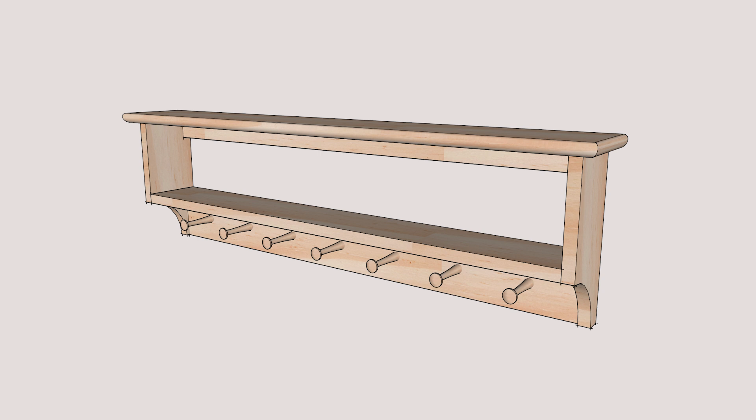I thought it would be nice to come up with a simple project that the carpenters could build during the class so that they could learn how to use power tools and important design characteristics in woodworking. So I thought I'd show you how I designed this rack in SketchUp and how I took that information then to the shop to build it.

I want to step through the design process and my thoughts on this coat rack. I wanted to make it simple to build, so I started with simple shapes.

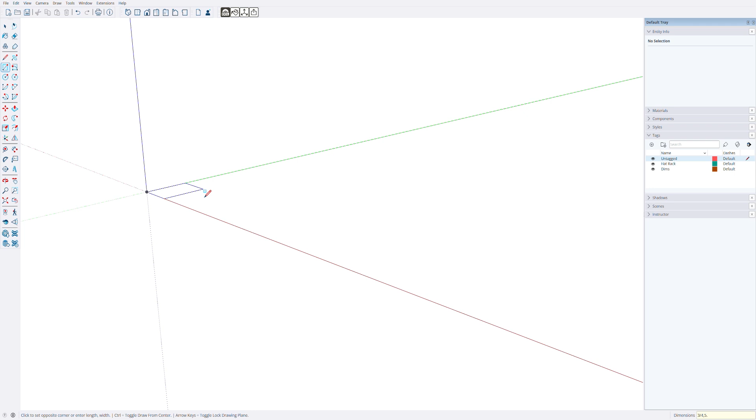Here I'm going to start with the ends. They're going to be 3/4 inch thick by 5.5 inches wide. And for length, let's just go for 10 inches.

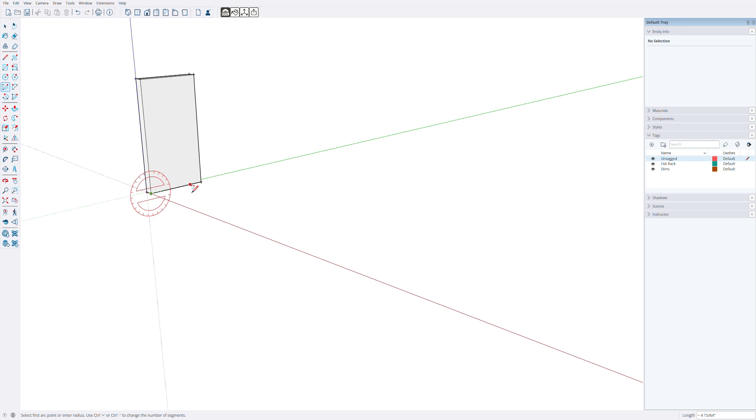I thought, well, let's put a little visual interest on this. So I thought maybe I would put a cutout here, an arc cutout, like so. I'll push pull that. I'm using the professional version of SketchUp.

Your mileage may vary. It may look a little different on the free version, but you should be able to accomplish the same thing on your version.

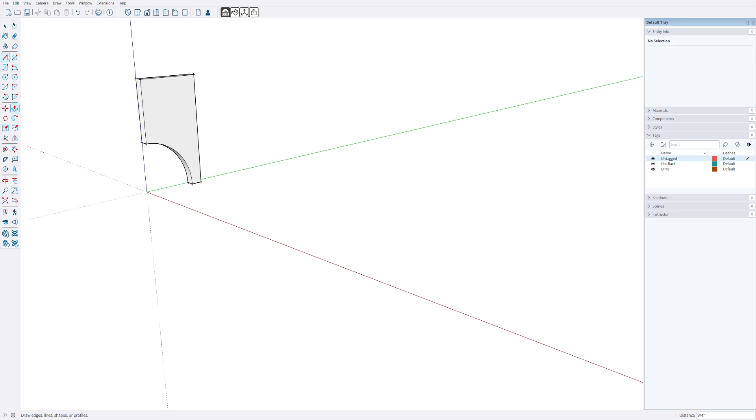So here's what I thought would look good for the end of the shelves. I'm going to go ahead and triple click on that and make that into a component and call it end.

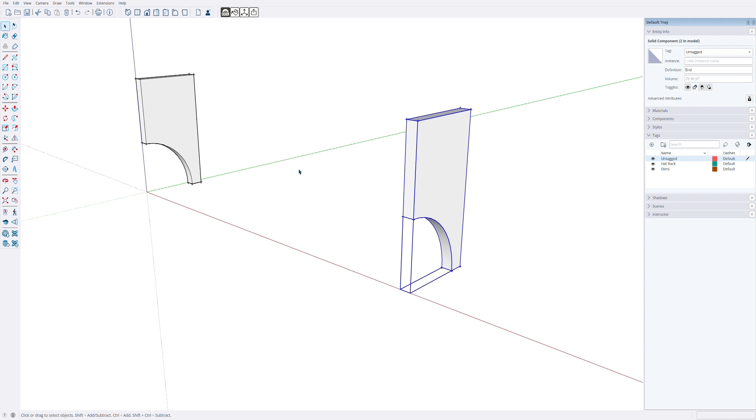So I need to copy that to the other side. Now the question is, how long should I make this? And that is entirely up to you. For me, the one I'm making has to fit a particular space in my home. The space in my home will accommodate about a 38-inch long shelf or wide shelf.

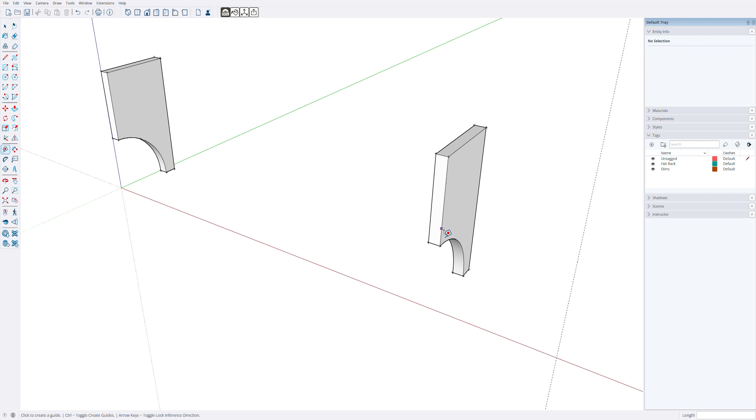So I'm going to put a construction line in here and go along the red axis 38 inches. And now I can move this guy to that line, and I have 38 inches between them, or 38 inches end to end.

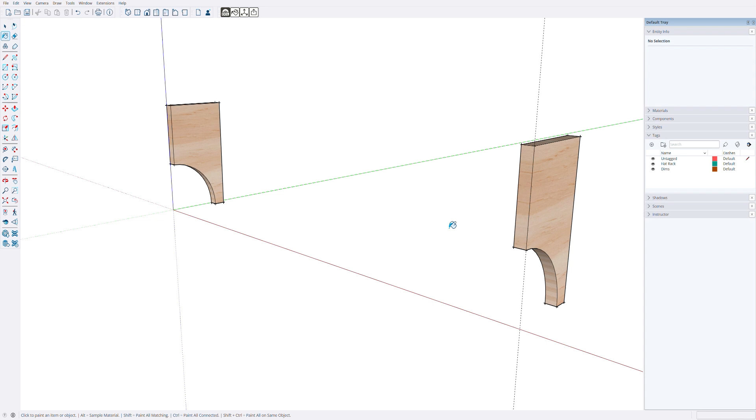Okay, so those are the ends. Let me go ahead and put a color on these just to make them easier to see. I've actually got a material that I've used that I developed just by taking a photograph and making a new material. That's something you may or may not be able to do in the free version. And I realize the grain direction here is wrong, but we'll address that at some point in the future.

All right, so I've got the front of my shelf, or the ends of my shelf done. I need to figure out the structure of it.

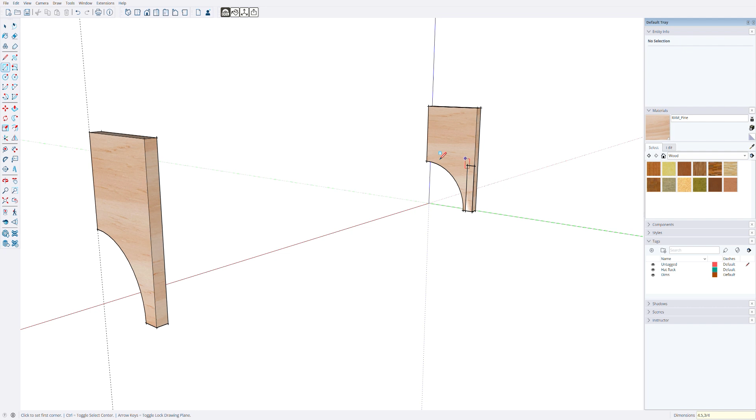So I thought for the back, I would use a 1x5 here. And I'm going to use the push-pull function to drag that across to here. I'm going to make that a component and call it the peg rack, because this board is where the pegs will actually be mounted to hold the coats or hats or whatever it is you have.

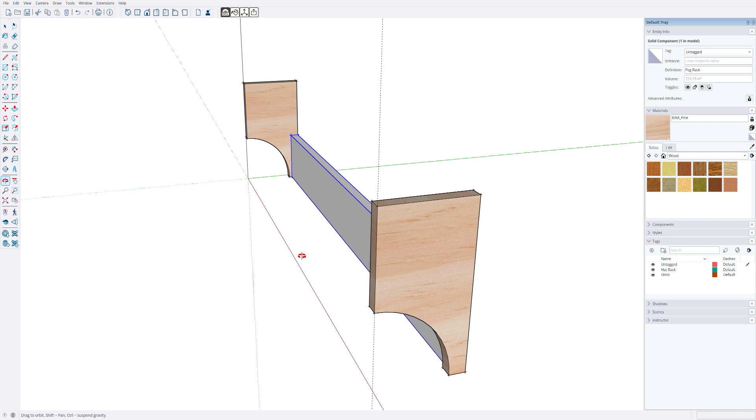So I'm going to put a shelf in here. I'm going to make it the same width as the ends, which is 5.5. So it'll be 3/4 inches thick by 5.5.

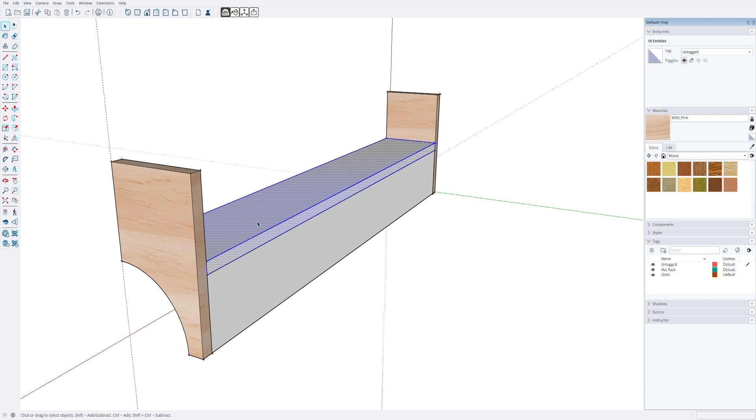And just like I did for the back, I'm going to use the push-pull command and drag that over to this edge of the end. I'm going to triple click on that and make that a component. I'll just call that the shelf. Go ahead and add some material.

So that's starting to take shape now. I'm going to go ahead and get rid of the axes just to make things a little clearer, and I'm going to delete the guides for right now.

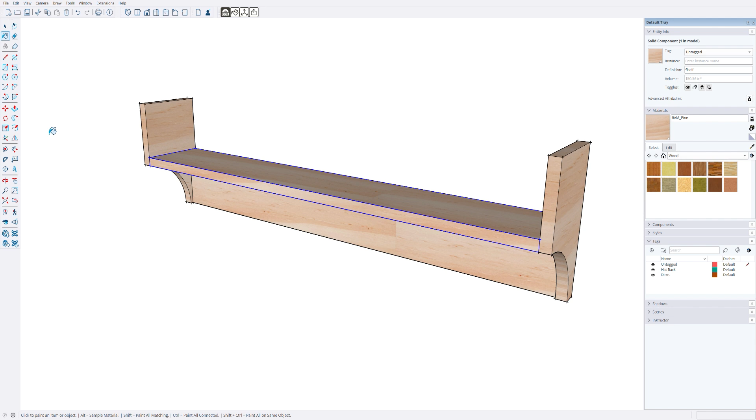Don't need those. Now for the top, I think I want a 1-inch overhang on the ends and the front. And the way I do that is I come in here and I'll just go ahead and draw a rectangle from corner to corner, use the push-pull command, and we're going to make a top that's 3/4 of an inch thick.

And then I'll come down to the end and extend that 1 inch, come down to the front, extend that 1 inch, and come down here and extend that 1 inch. So that's what the top looks like, but it's kind of boring that way.

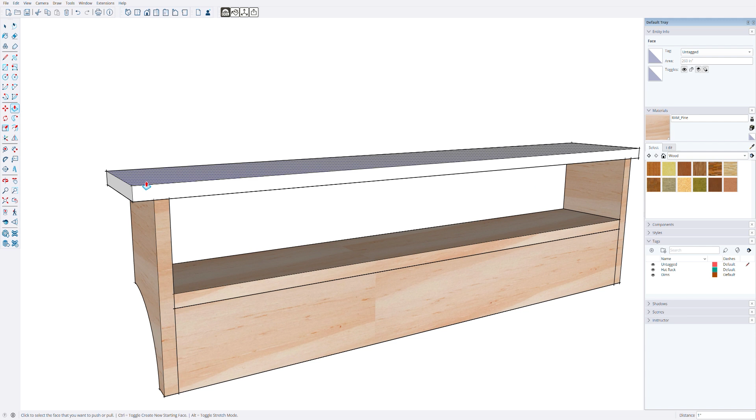So I thought maybe I would put a profile on here. And to do that, I'm going to use the follow me command. So I got to draw some guidelines in here. I want the top edge to be a 1/4 inch radius and the bottom edge to be a 1/2 inch radius. I'll draw some guides in here.

There's my 1/4 inch, my 1/2 inch radius, come up from the bottom edge, 1/2 inch radius, and this should be a 1/4 inch. So I'll go in here and draw some arcs. And I'll draw the 1/2 inch arc. And we end up with something that looks like this.

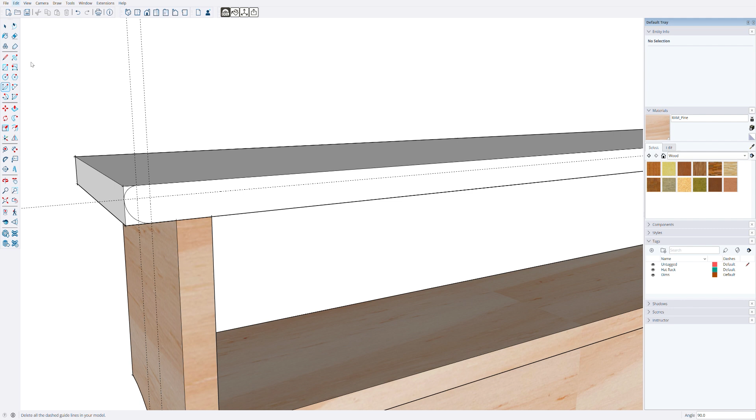I should be able to use the push-pull command, or I'm sorry, the follow me command, to extrude that all the way around the 3 edges. Let's see if I can do the same with the 1/2 inch.

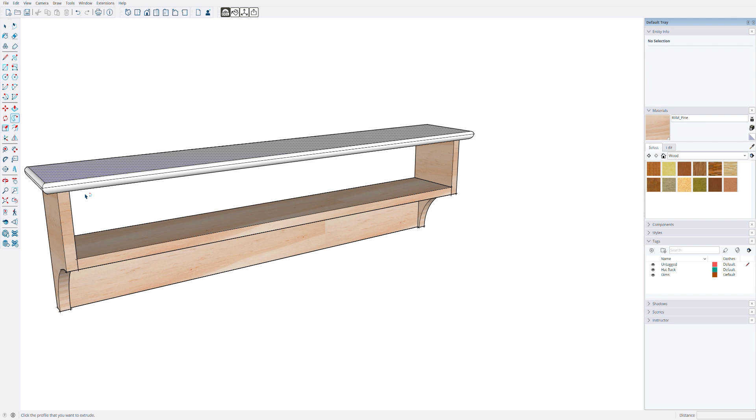There we go. Now I've got this ugly line on the front, so I can just go into my erase command, hold the shift key down, and it'll get rid of that line without erasing anything else. It's a handy little trick to clean up your drawing.

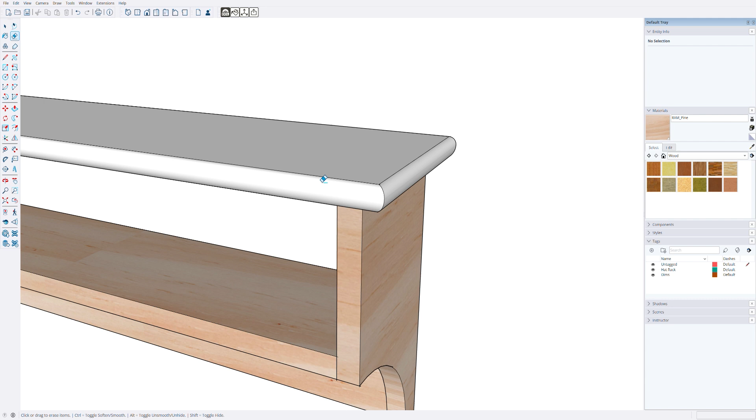So I'll put a material on that. Let's go ahead and make that a component, so I'll call that the top. And put a material on it.

And that pretty much completes the structure, except anything I hang on the wall, I like to include a hanging rail. Now obviously we can fasten this to the wall through this piece here on the bottom, but I'd feel better if I included a hanging rail at the top.

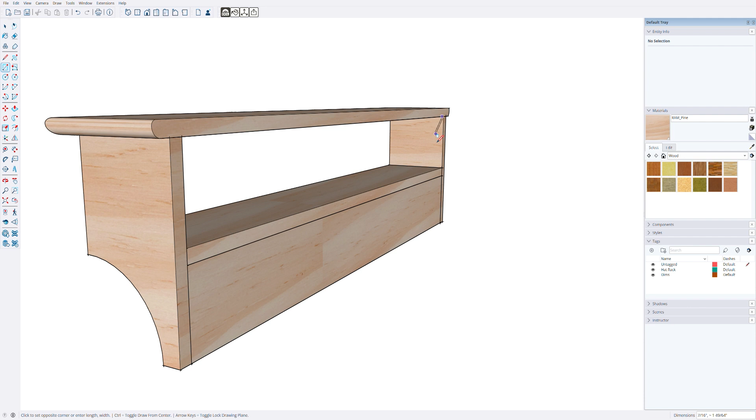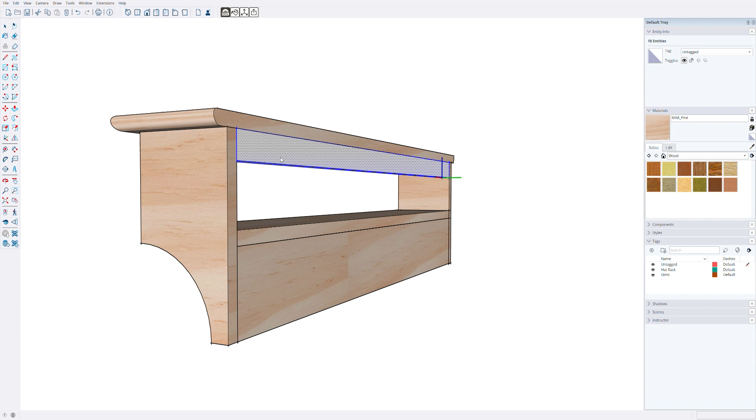It's just going to be about 1.5 inches or so in length, like so. And I'll use the push-pull command to drag that over to this edge. Make that a component and call that the hang rail, and apply a material to that.

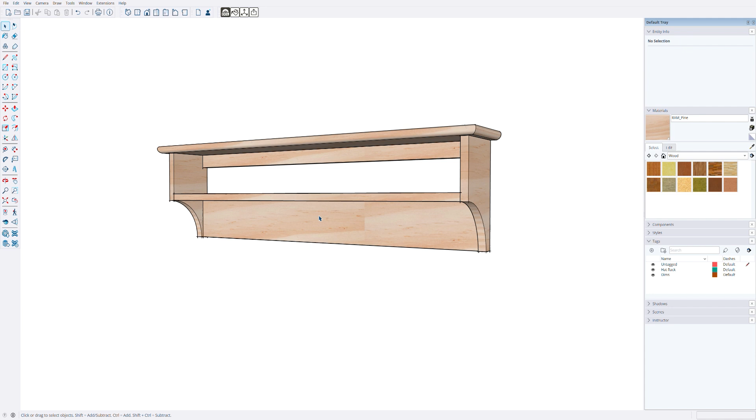So now I've got a place to anchor this to the wall through both the top, and if I feel like it's necessary, I can do it at the bottom also. Winter coats, if you're in a cold climate, can get rather heavy, so make sure you secure this to the wall in such a way that those aren't going to pull the shelf off.

All right, so the only thing I've got left to do now is add the pegs to this rail at the bottom. To do that, I used the 3D Warehouse, which is available with your SketchUp account, and I just did a search for shaker peg.

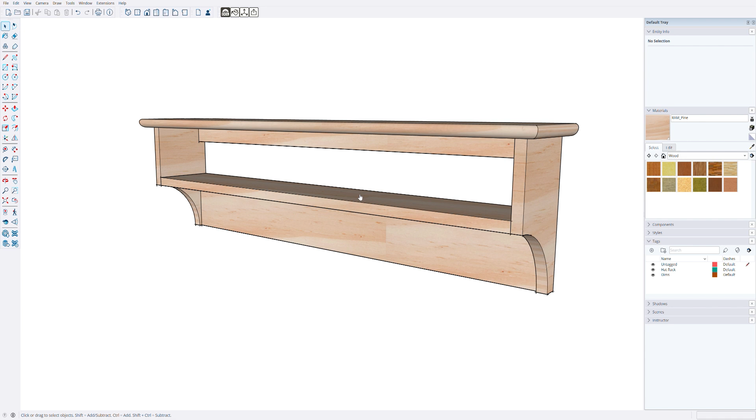You'll find a variety of them. You can click on it and download it to your model, and then just place it. Now the origin point that they include is sometimes random, so you just have to place it and then you can fine-tune that later.

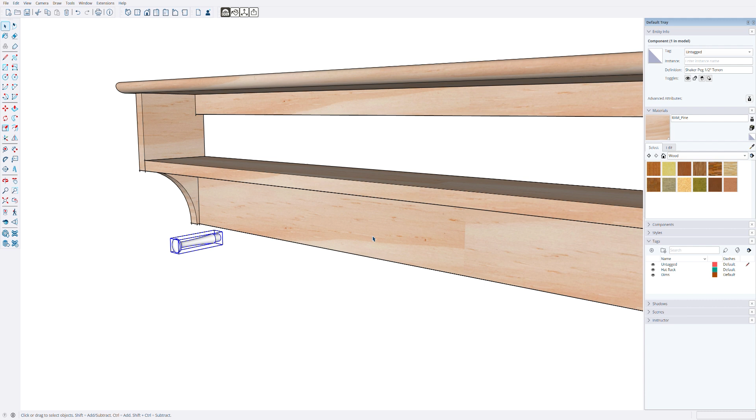Alright, so I know that this shaker peg has a 1/2-inch tenon on the end, so I need to put 1/2-inch holes in this rail to accommodate the peg. So I'm going to draw a guideline here that's at the midpoint of that rail.

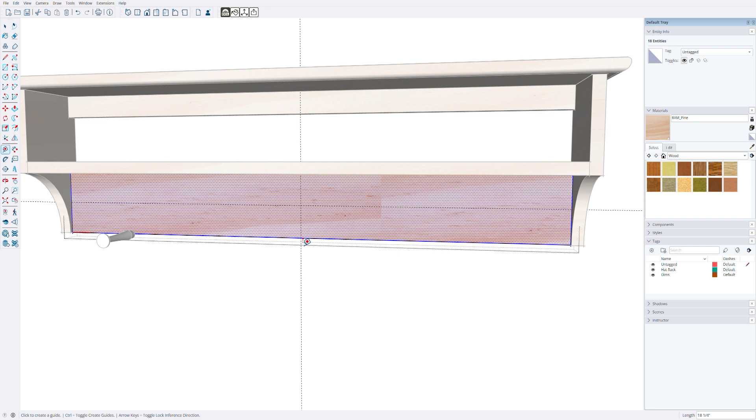And I'll come in, I'm going to put a peg right in the center, so I'll put one there. Now I've got the intersecting point where I can put in a 1/2-inch diameter hole, and of course the radius on that is 1/4, and then I can push-pull that to create the hole.

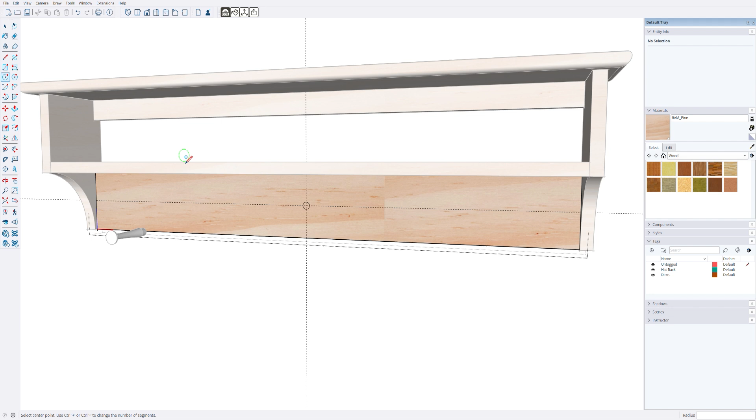But before I do that, I want to make the holes or define the circles for the rest of the pegs. Now for mine, I want to make them 5 inches apart, so I'm going to select that.

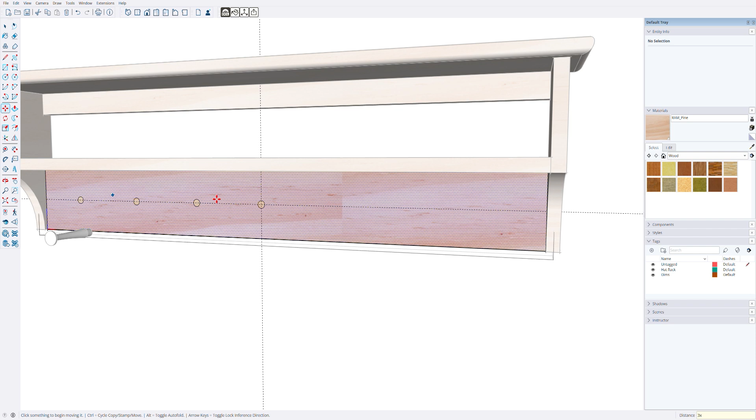Then I'm going to use the move command and hold the control key to make a copy. I'm just going to grab the center of that circle, and we're going to come out 5 inches, and I want to tell it I need 2 or 3 of those. So you just type in 3x and it goes ahead and copies the rest with a spacing of 5 inches.

So I'm going to do the same on the other side. I'm going to select that, use my move command with the control key, select that, and come along the red axis 5 inches, and I want 3 of those.

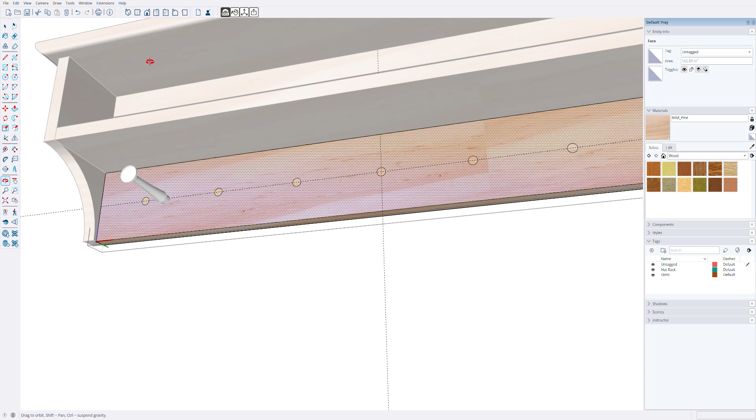So now I can go in here and use my push-pull command to extrude that through a full 3/4 inch. One trick with SketchUp is that once you do that with one push-pull command, the next push-pull command assumes you want to go the same distance, so all you need to do is double-click on the area, and it will extrude those the same distance as the first one.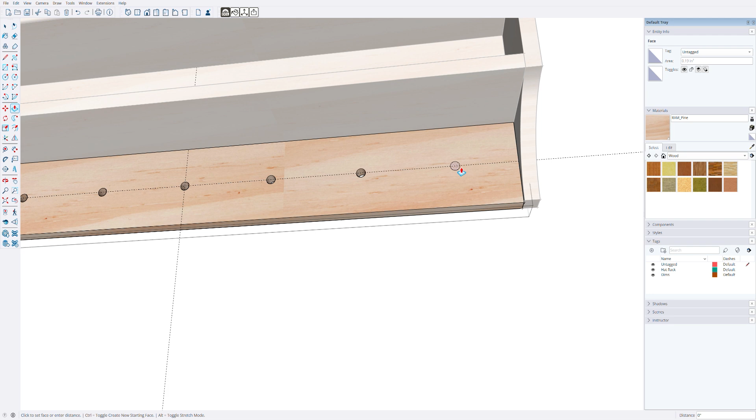And now I have my peg rail all set. All I need to do now is place my shaker pegs. So that can be a little tricky.

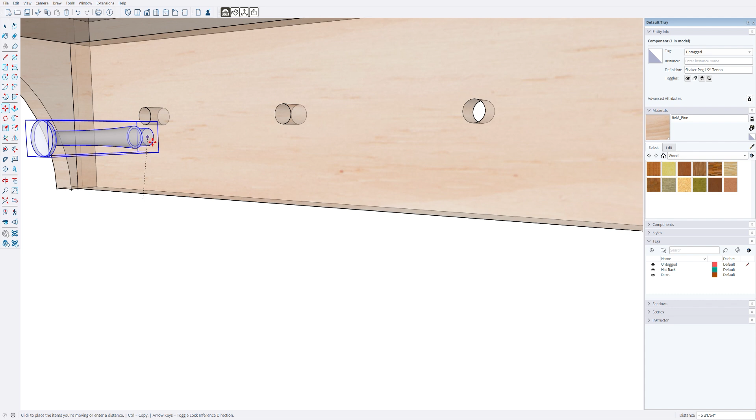So what I do is I go in here and change the face style to X-ray temporarily, and I use the move command and go to the endpoint that the author of this shaker peg defined, which is really the center. Let's see if I can grab the center of that. I'm not sure I'm there, but let's go back to our normal view and see what happened here. Yeah, we're not even close.

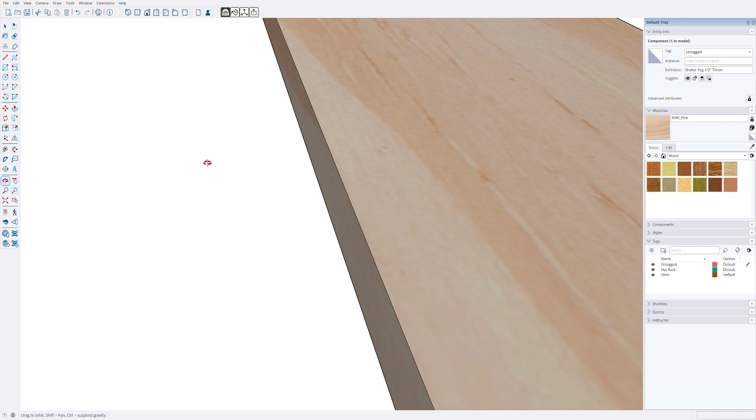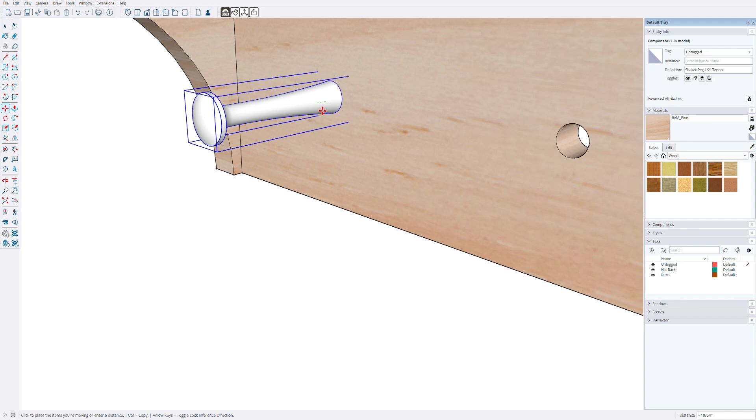So maybe an easier way to do this is from the back. Grab that and hover over the circle, and it finds the center. Problem is the tenon's not a full 3/4 inches thick, so just visually I'll grab this peg and pull it in the green direction until I see the shoulder right here along the edge.

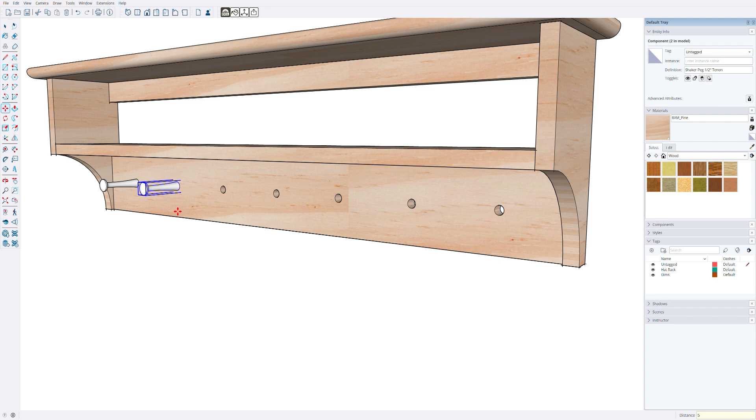Okay, so I've got one peg placed. I need to copy that across the rail. So I'll select that, hit the move command, control key, and I can just pick some random point, doesn't matter, and copy that over, say 5 inches, and I need 6 of those, so I'll do 6x, and it completes the installation of all those pegs.

And I can go in here and assign material to those if I want.

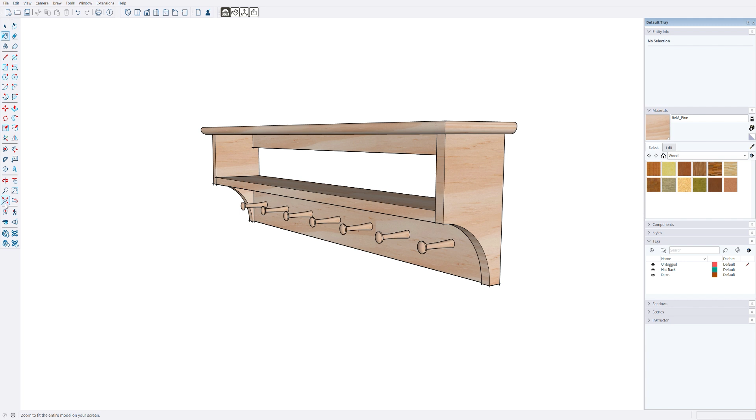So with all that done, I now have all the dimensions I need to take this out to the shop and make all the pieces and put it together.

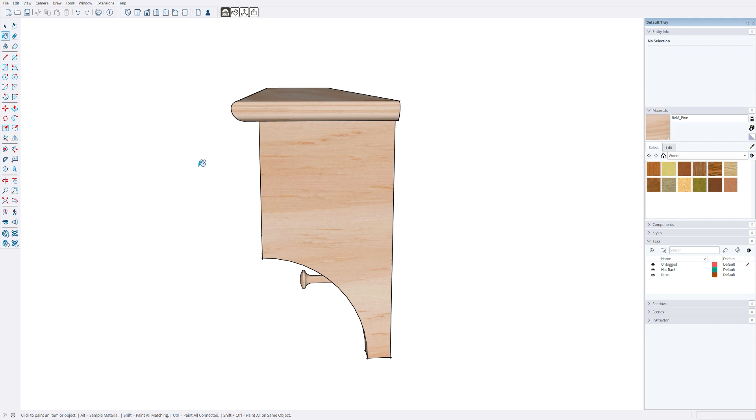The only tricky part is the top profile. We use a 1/4 inch round over bit at the router table for the top edge and a 1/2 inch round over bit for the bottom edge, just to create this profile on the front. So with that information, you're set to go out to the shop and start building.